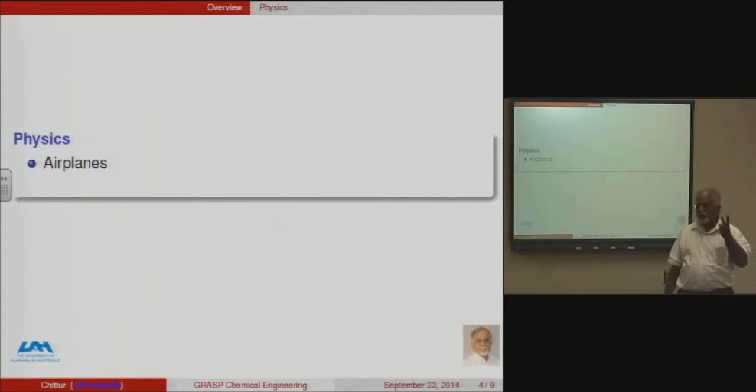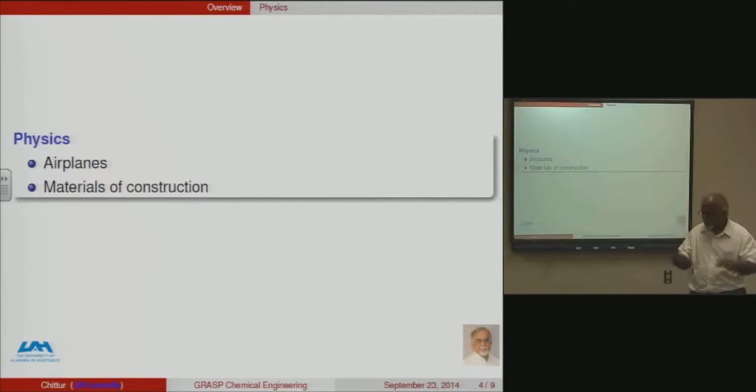Okay, the two products in the physics module we're going to talk about are airplanes, if you will, and, I shouldn't say products, but the material that is used in the construction of the product called airplanes. So the two things we're going to talk about. Okay, it's amazing, right? These really heavy objects that can fly for hours, made of heavier than air. How does that actually happen?

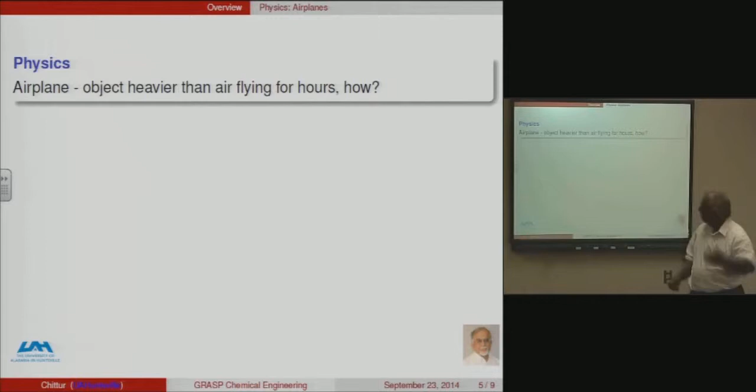So we'll talk about a very important principle called Bernoulli's principle, which will help us understand how airplanes can fly. We'll take a look at an equation called Bernoulli's equation, which is the conservation of energy equation. And then we'll take a look at the material of construction used to make the airplanes, and try to answer the question why they're made of, say, metals or composites, as opposed to, say, concrete.

Is it possible to have airplanes made of concrete? Highly unlikely. It's not going to survive the stresses and strains. Concrete doesn't have the right properties to actually build an airplane, but aluminum does. And composites also do, and composites actually are better than aluminum. So we'll take a look at that.

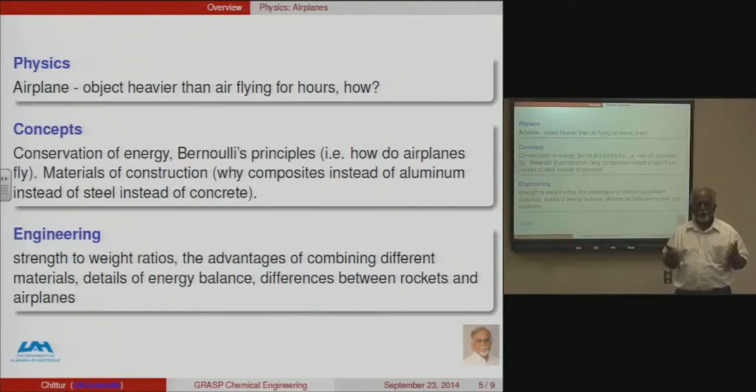Some of the engineering concepts we're going to look at are issues like strength to weight ratios. What is the advantage of combining different materials together, like composite materials? Why do we get some amazing properties when we combine materials together? In particular, the 787, for example, is made of composites.

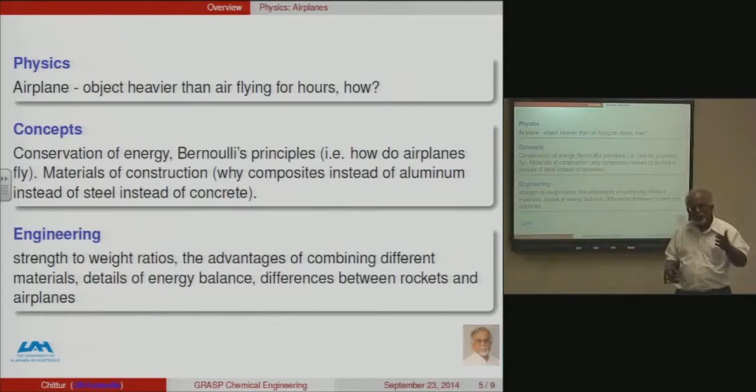So we'll take a look at some energy balances, and we'll briefly take a look at the difference between rockets and airplanes. The principle is different, but in both cases we are burning fuel to create the mechanical energy in order to move something through a distance.

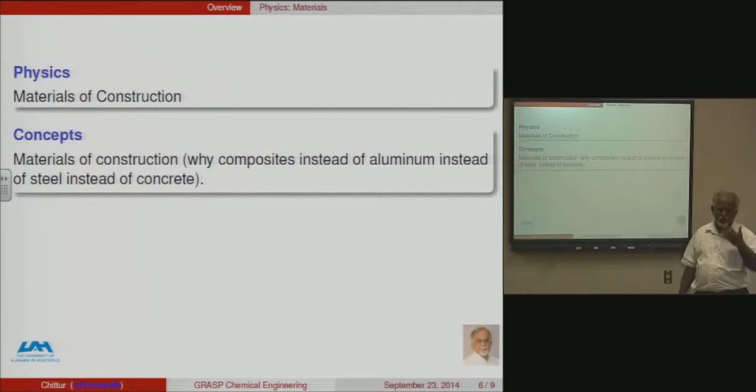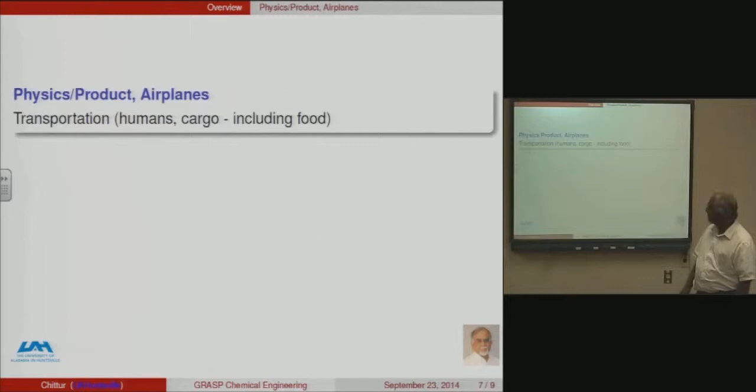In the materials of construction, we'll take a look at differences in properties between composites and steel and so on. We'll take a look at strength to weight ratios, as I mentioned in the last slide, advantages of combining different materials and so forth. Energy balance, we'll briefly take a look at that. Essentially we have an equation that shows the relation between lift and velocity of air flowing past a wing, for example.

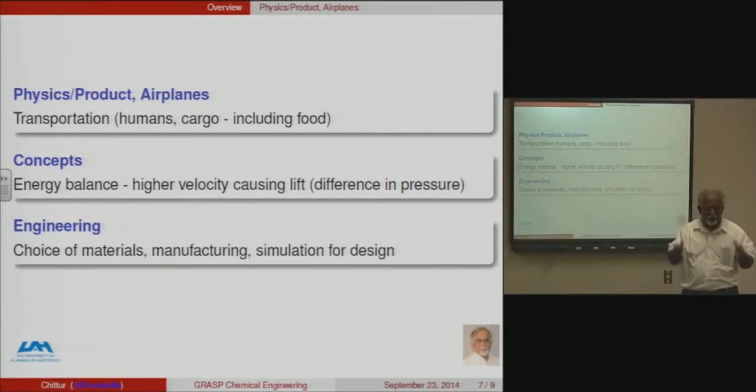It really has to do with directing the airflow around the wing in the case of the airplane, and the sails in the case of these sailing boats. And we'll talk a little bit about that.

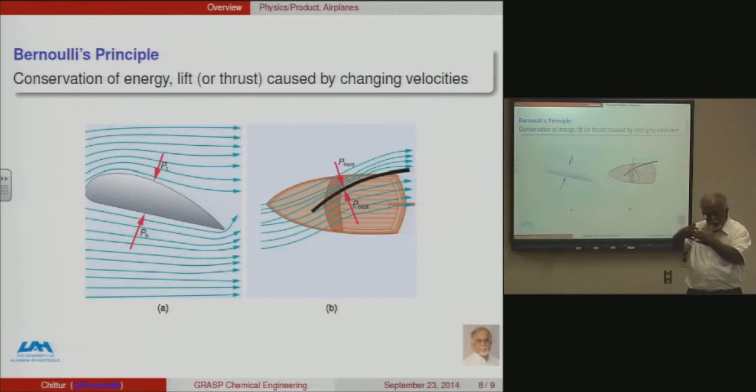And we'll briefly talk about the choice of materials, concepts like strength to weight ratios; the ability to make shapes is also important. You could have a material that has a wonderful strength to weight ratio, but if you can't work with it in manufacture, then it's not going to be very helpful.

And of course, durability and resistance to the environment. If you make airplanes worth several tens of millions of dollars, you want them to last a long time. We have planes that have lasted 30, 40 years. What gives them durability is the ability to resist the environment and keep their properties. That's also very, very important.

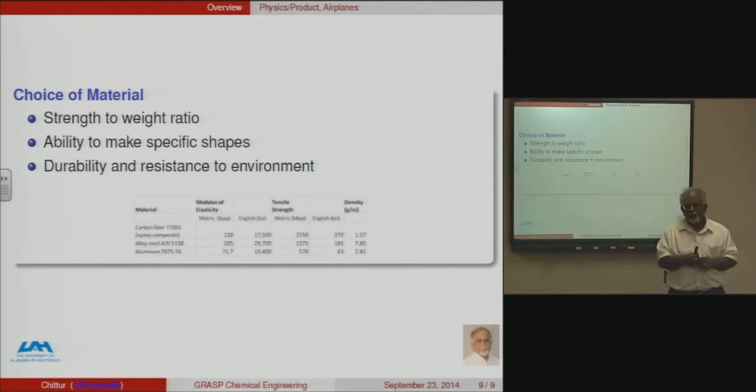So in physics, we'll talk about airplanes, related sailboats and so forth, and about the materials of construction, some of the properties of the materials that make them suitable for airplanes, and we'll talk about the energy equation, Bernoulli's principle, and so forth.